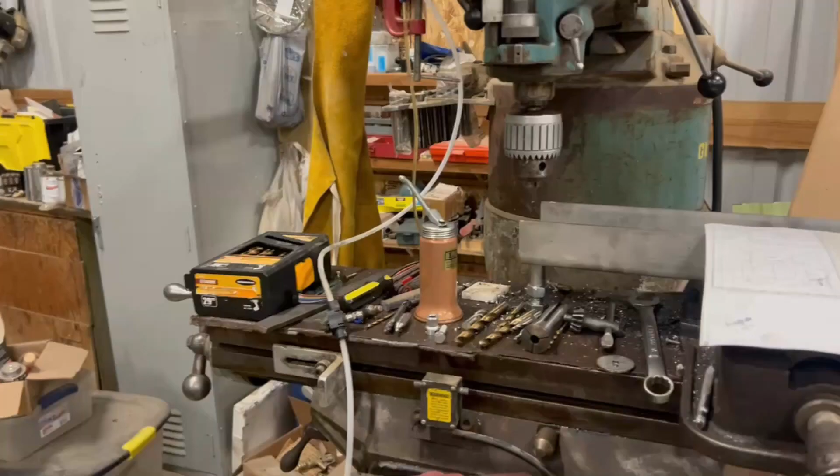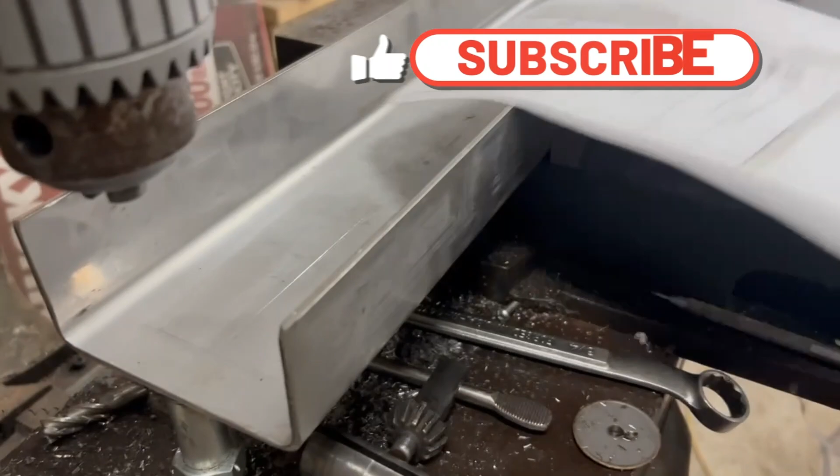Okay, I'm ready to cut this part of the side rail of the gantry out. Going to be cutting some of this out right here. So I'll show you what I have here.

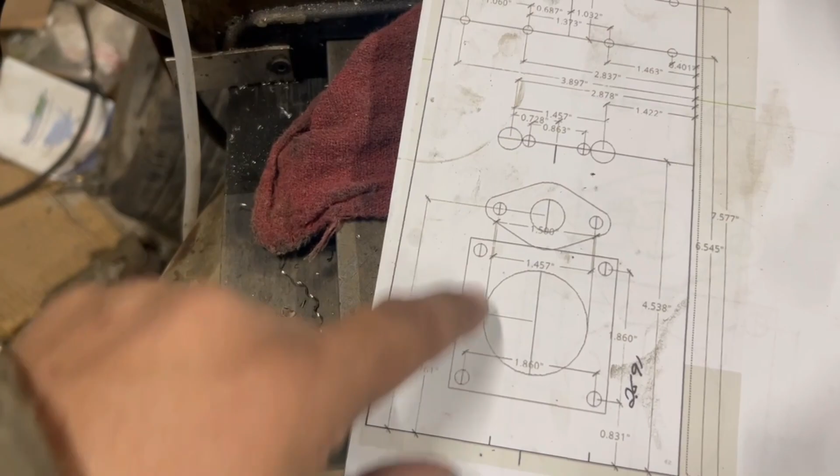This is where my motor is going to mount, and I'm going to be drilling these all out. This is going to be cut out with a hole saw. Then I'm going to move it down 0.6 of an inch, and then I'll cut it out, and then I'll take an end mill and slot all these holes. That will allow adjustment for my reduction gear system here, so that way I can tension that belt up.

This is where a bearing is going to mount, so I need to drill out that hole for a little larger than an 8mm shaft. And then these will be 1/4 inch, so I can mount the bearing there.

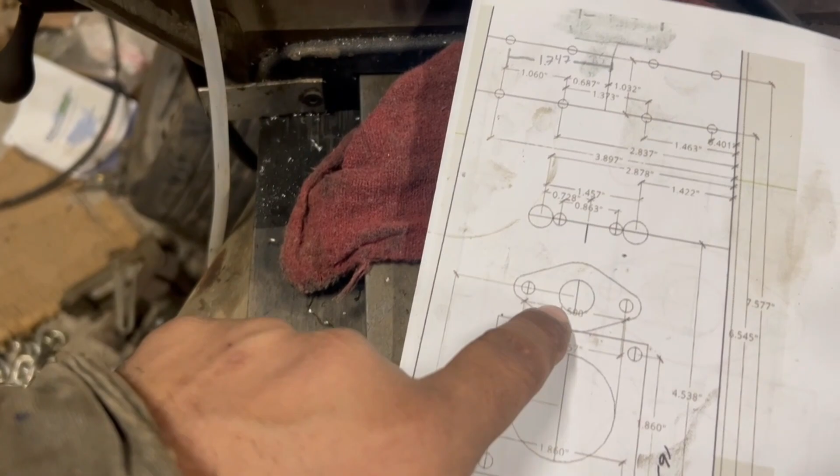Then up here, these holes, I'm not going to use anymore. This was going to be with the idler bearings that I had bought, but they're just too small. I'm going to use skateboard bearings, so I'm going to be mounting them further out, and that's going to be a 5/16 hole, and that will hold them on, and then I don't have to do any additional brackets to hold them. That'll be strong enough.

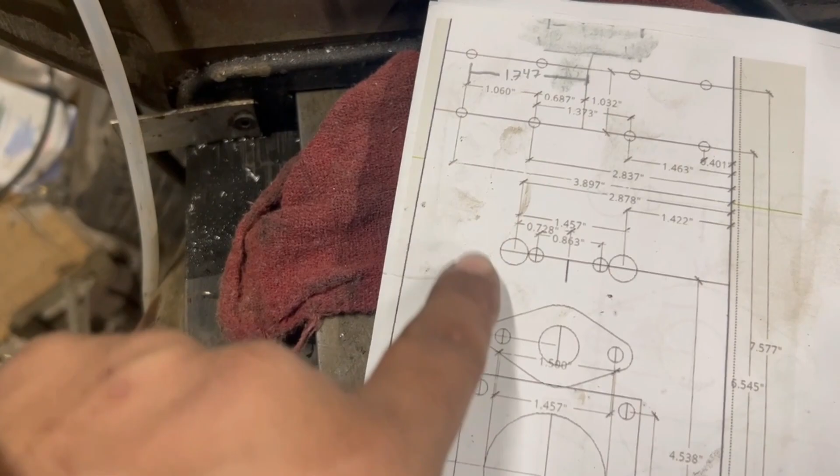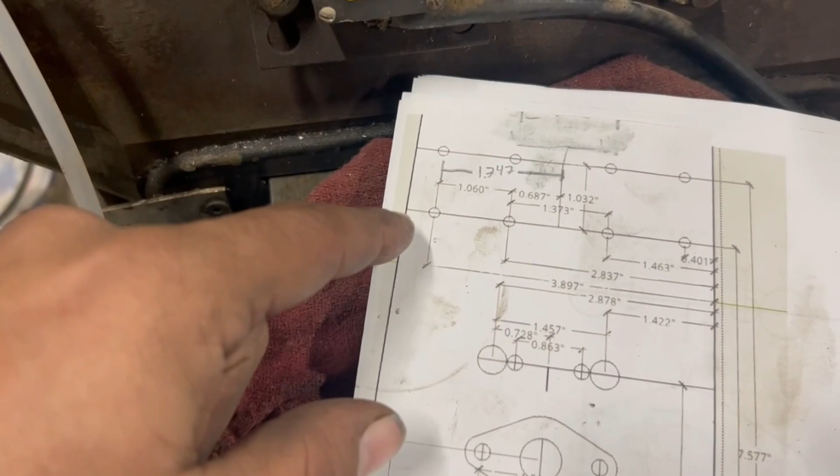And then when we come up here, here's all the holes I'm going to need up here for the linear bearings. So once I get up to here, I'll drill all the holes, but I'm going to have a problem with these holes in the corner because they're right on the bend of this channel, and it makes my bits want to wander. So I'm going to have to drill these 4, flip it over, then indicate where I'm at, and then come over and drill the last 4 holes on the edge.

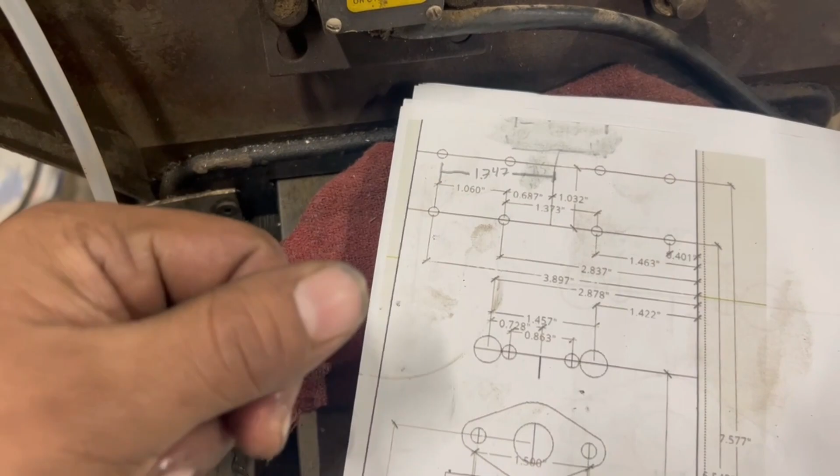And I'll be using this, how it is now. I'll show you that I cannot use this right now, but from the top I'll be able to use it. And if it doesn't work right, I'll just go through with the end mill, just take my time, and it'll work fine. Those are all the holes I need to cut here.

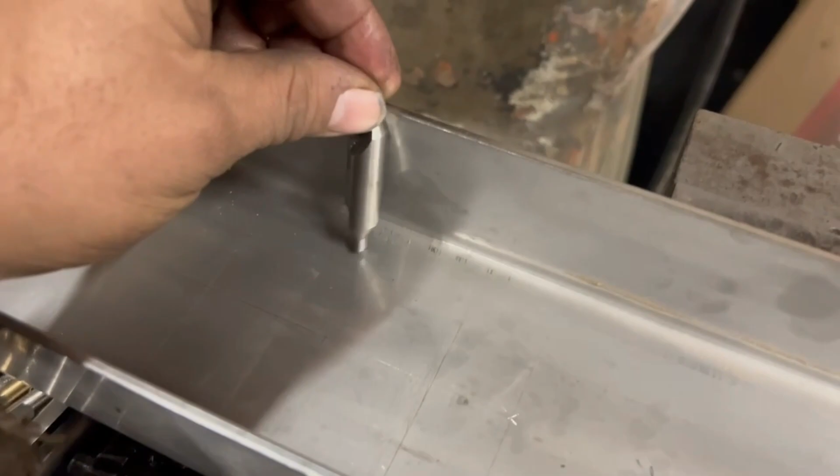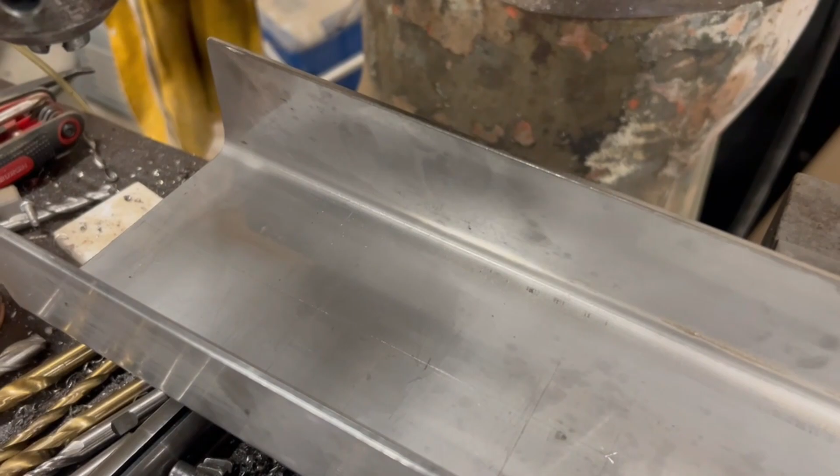So I have it set up right here, but if you look to try to get all the way to the edge here, I can't hold on to it in my chuck and get down there and drill those. So I already did one of these and just testing everything out, and it didn't really work good in those corners. It just made the bit wander, and so I had big holes because it did not want to work right. So I'll just do the 4 in the middle and then turn it over and do the 4 outers. That should work pretty good.

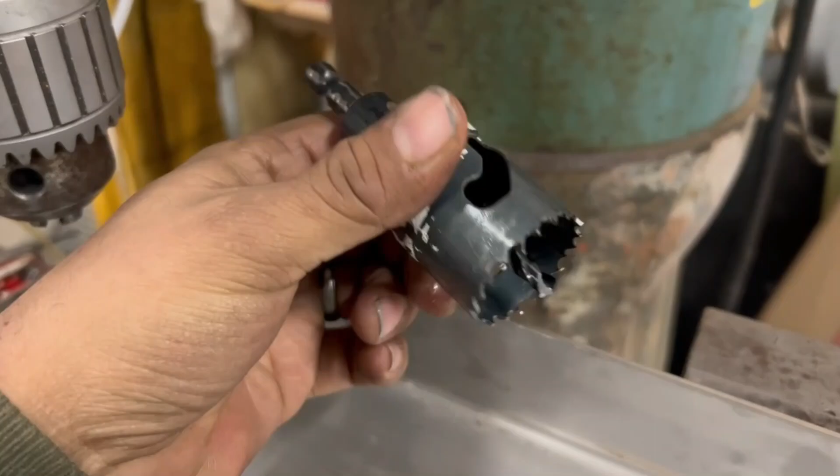I'm going to be using a 1.5-inch hole saw to cut where the motor is, for the part of the motor that sticks out a little bit. So it needs to be slotted there.

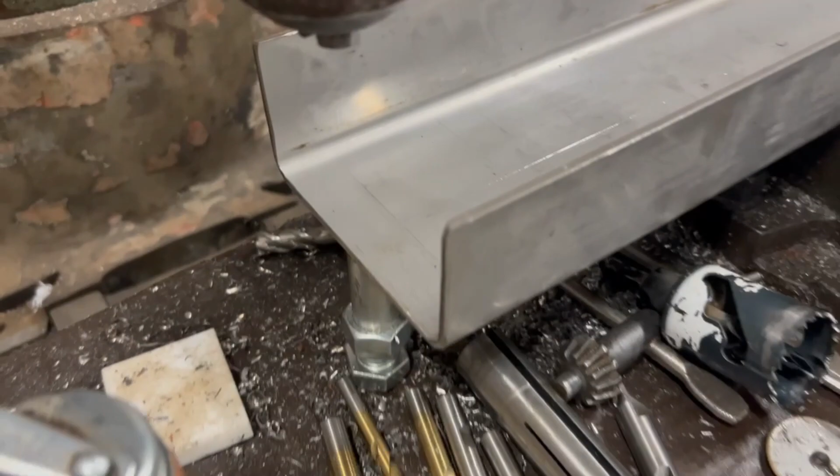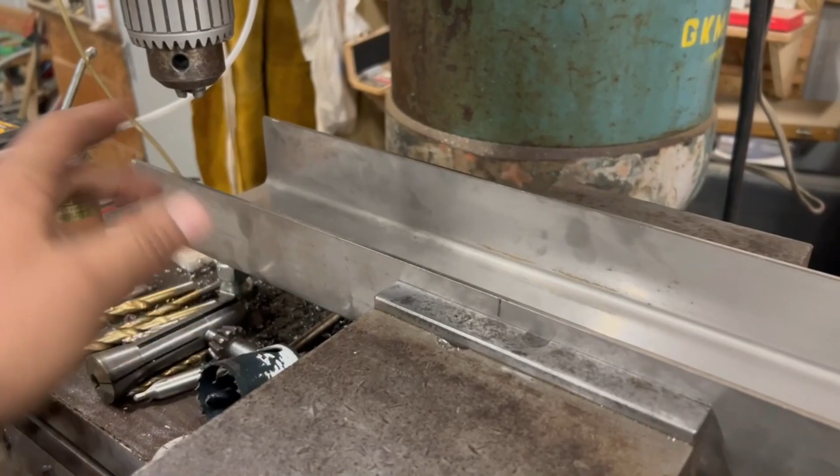Yeah, so we got to get these all drilled, and we can get this put together. I'm not a machinist, so don't listen to anything I say as far as how to do things with this stuff, because I don't know myself. I just kind of make things work.

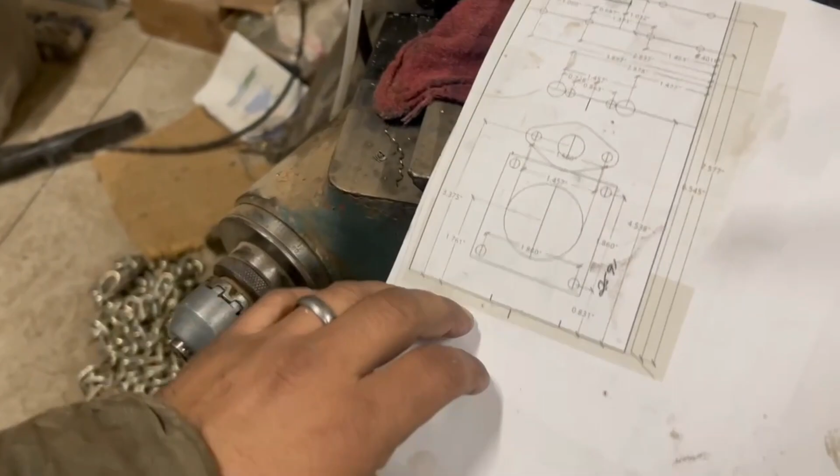Not the best way, and I am not very proficient at this at all. I wish I had a DRO to do this, because when you're measuring all these numbers out here, it's hard to remember everything. So I'm always going back to where I know I'm zeroed at, and then come forward again and do all my adjustments, so that way I can make sure I'm in the right place. With the DRO, that's a little bit easier to do, but I don't have one.

So I'm already centered here, centered right in the middle and then on this edge, so then I can just move up to wherever I need to be.

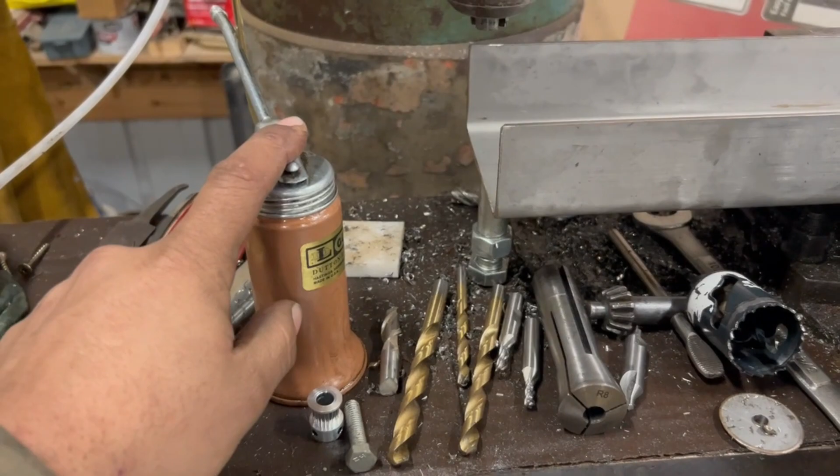Lots of lubrication. If you don't lubricate your bits enough, you will burn them out. I burned way too many, and you just need to keep a lot of oil on there. It gets messy, and you got to clean it up afterward, but that's what I have to do to make things work.

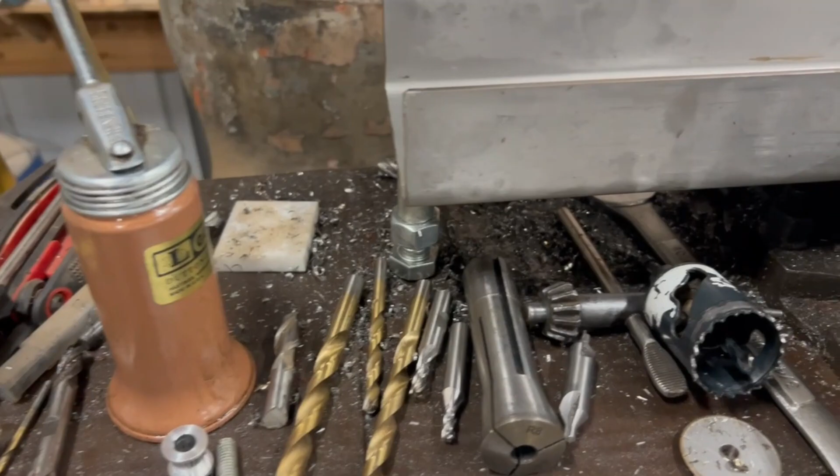I do have this nozzle here, but I don't have it hooked up right now. Maybe I should get it hooked up while I'm drilling all this.

But I am ready to start drilling these out and get this side finished, so that way I can move on to the next step. So let's go into warp speed.

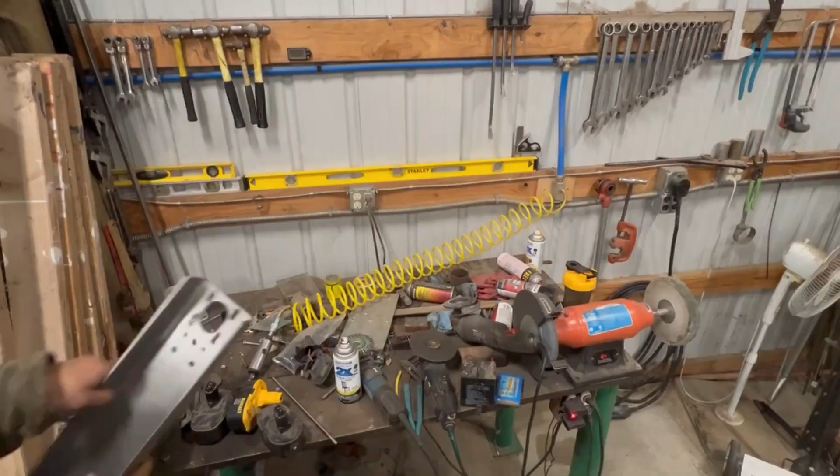Hole cleaned up. Okay, so I have my Dremel hooked up, ready to go. I'm going to try to clamp this down a little bit so you guys can maybe see some of what's going on here. So I'm just going to come through here, make sure everything's good, widen everything up just a hair.

Oh, that freezes my hands. Okay, before we do some test fitting here, let's see, can we see here? All right, so what I have here is the bearings I'm going to use, little pillow block bearings, 2-bolt flange.

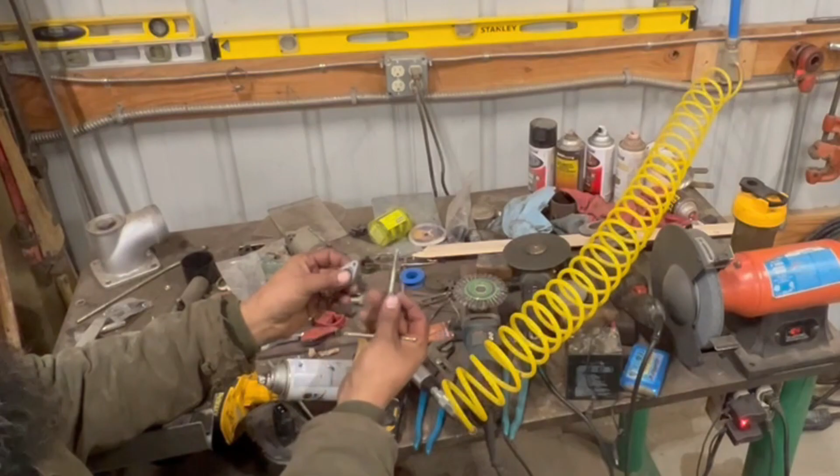They're really close to a 1/4 inch. So I got a 1/4 inch 20 tap here, and we're going to tap them out. That way we don't have to have nuts on these. This makes it a lot easier just to go ahead and tap these out. And I think it's just like a cast aluminum. It's really soft.

Not perfect, but it'll work. And when we're on our final assembly of this machine, we will Loctite everything up. That way things don't back out on us at all. We'll use some lock washers. I got some serrated lock washers coming

for a lot of this stuff. And I got some flanged bolts coming to mount the motors. But with a little bit of Loctite and those serrated lock nuts, I don't think any of this will come apart. I think everything will hold pretty good. Same thing with the motors. Perfect size for a 1/4 inch tap. So just go ahead and tap everything out.

I really dislike using nuts on things, and as far as this one goes, you'd have to bring a cap screw from the back, because I don't think you're going to make a nut work in here unless you made a special nut. I like, when I build things, as much as I can, sometimes time doesn't permit it, but it's always good to tap everything. That way you don't have to have another wrench here to hold the nut on. And also, it makes it a lot easier just using power tools, taking stuff on and off, not having to even have a hand wrench with you, an open end wrench or box end wrench to grab the other side.

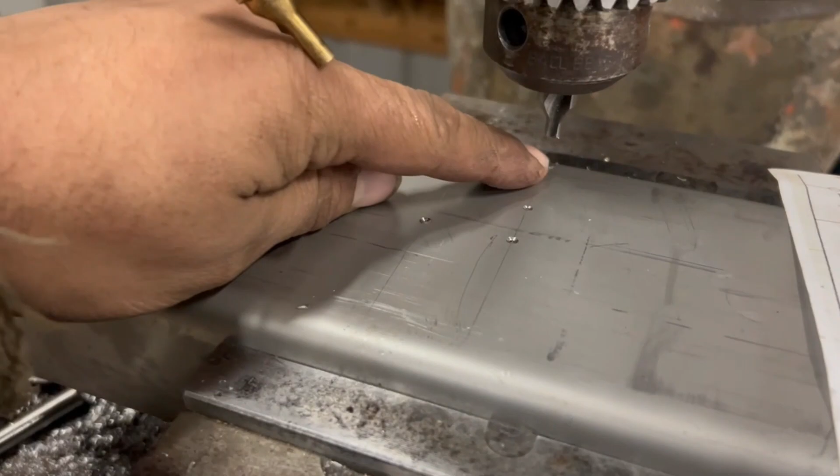Okay, so I have my little center drill here. I got that one down. I'm going to move over and center drill this one. Then I'll change my bit out. And I will drill this one, come back and drill this one, come back and drill this one, and then I'll put my center bit back on, and I'll put my next 3 divots in, put my drill bit on, drill those, and then come and drill these. I don't think I really need the center punch or the center drill for these two. If I do, I can do it, but I don't think I'll need it. And I'll drill those in, and I should be good to go. Let's go to warp speed again and drill these holes.

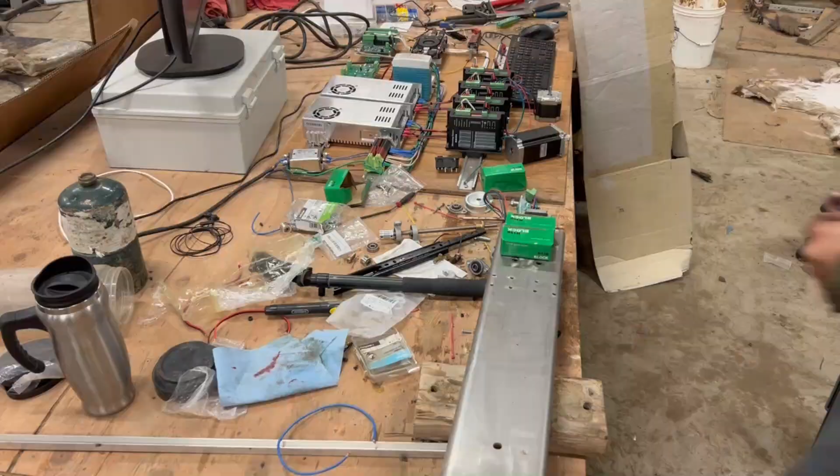I don't know if you guys saw that drill bit break when I was cutting those holes, but that drill bit just shattered. Never had a drill bit shatter that way. A piece hit me in the knuckle and sliced it open pretty good, and it just keeps on bleeding. Messy, messy, messy. Doesn't even hurt, it's just bleeding like crazy.

So here's the linear bearings, and we'll see how well things line up. Got everything deburred here. I might have to come back and make these holes a little bit bigger. I think everything will fit, it's just I'm going to need enough slop in them to be able to make everything square. And there might be enough slop. We'll see, the other side has a little bit more slop to it.

Man, look at that, it just doesn't stop. I'm bleeding on this table and everything. It's horrible. Yeah, perfect, I need that. I was over here working and just got blood everywhere.

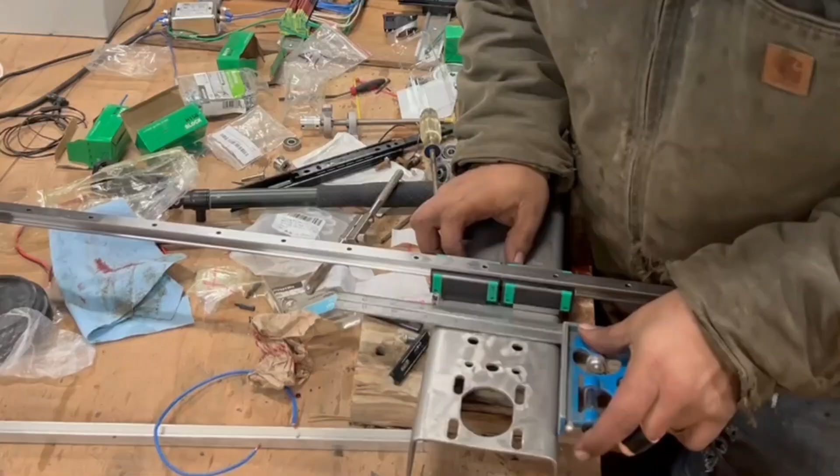So you mount these up on a rail, and then we tighten everything down. Okay, so I have the linear rail here, I'll take it and try to push these out. Now let me get my square and see how square we are here. Yeah, we look pretty good, I'm not going to complain there. That looks good, there's not a lot of wiggle room, there's a little bit, not much at all.

And then we mount our motor, mount our bearing here. And I have my skateboard bearings, I only have one left. I had bought them for another project I had, actually when I got my Ender 3 printer many years ago, to make a spool holder. And I ordered a pack of them, I ordered 100 of them, I think for like $18 now. I'm sure they're not high quality bearings, but for this, I think they'll be just fine.

What I'm going to do, if I need to, you can see the size difference, so these bearings are just so little. I didn't think they were going to hold up, maybe they would, I don't know. But I didn't like them riding on a 5mm bolt, and so this is way better riding on a 5/16 bolt.